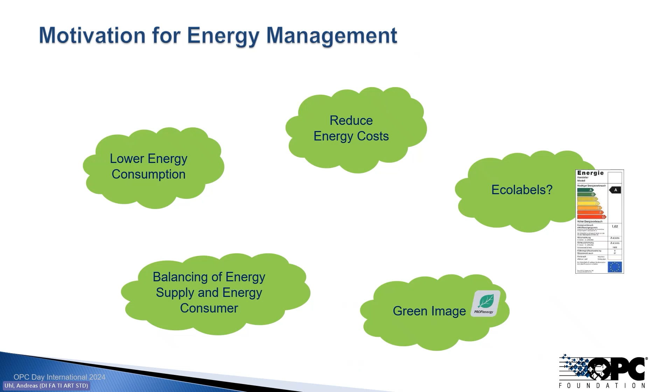But first, let's have a look at application areas for energy management. Energy saving in industrial production is a long-range topic, and the goal, of course, is primarily to cut down the costs for energy. If such a project starts, the first task is a consumption analysis, so have awareness and measure energy flows in your production. And out of this, define saving potential, so measures to save costs.

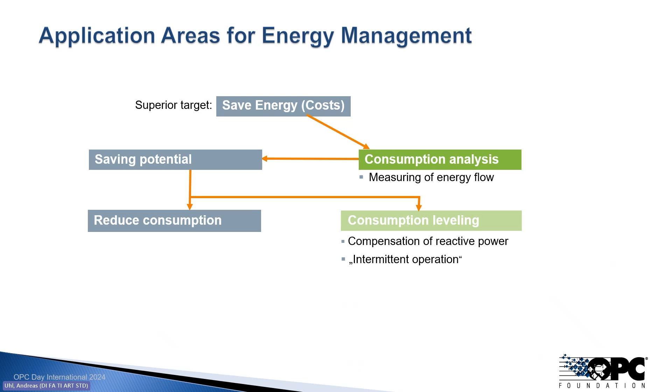And for this, you have two possibilities. Of course, reduce the overall power consumption, but also consume your power at the right time. For example, to avoid peak loads, and with this to avoid high penalty payments for peak powers, or to compensate for reactive power, and so on. But let's go further with reduced energy consumption in production.

There you have the possibility to save energy in production, in operation. This can be done by introducing a new technological process which consumes less energy, or using energy efficient components like energy efficient drives, or optimizing dynamic systems. But there's another possibility, which is also quite good: to save energy in pauses.

We have a lot of industry which is not continuous but intermittent, for example, body shops in car factories. There a lot of the equipment is only temporarily used, and if it is not used, the goal is to drive it into an energy optimized standby state. The red arrows show which measures or functionality in the energy consumption management companion specification address these tasks.

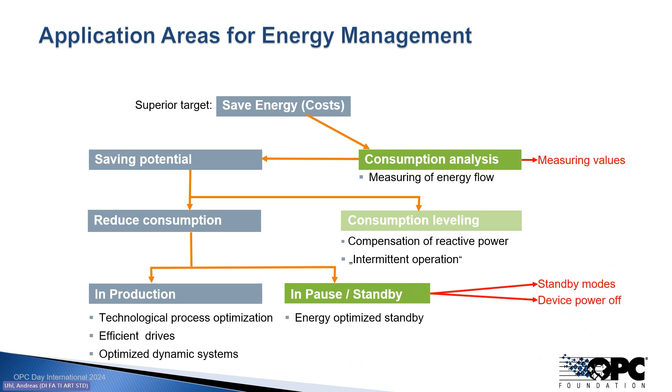And also be aware that increasing energy efficiency is a continuous process. It's not done once and then it's okay. You analyze your energy consumption, you define new energy savings, you realize them, then analyze again, and so on. And you see that to two of these three steps, the energy consumption management companion specification contributes.

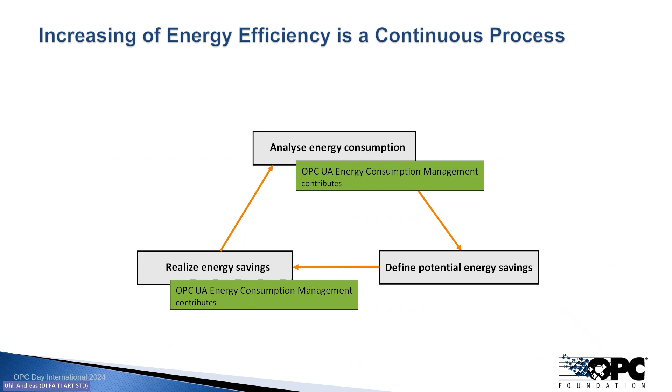But now let's have a look at what's in the companion specification, OPC UA part 34-100. There are mainly two functional clusters. The first one is power metering and monitoring. Of course we measure energy related values like power consumption or a total energy odometer. But there are also other relevant measurement values which address power quality, for example, a measurement of idle power or of harmonics, to cut down energy losses in power distribution.

Use cases for this are energy metering, of course, then evaluation of energy cuts and saving potential. But another quite important topic is predictive maintenance. Your energy consumption, your energy footprint monitored over time, gives a good indicator whether your process is running correctly, or whether machines or devices need maintenance.

The other cluster in the companion specification is power standby management. There we distinguish between two possibilities: a complete power down, switching off the device with reactivation over switch on or wake on LAN, or the device is still on power and manages its internal standby state. So that's standby pause management.

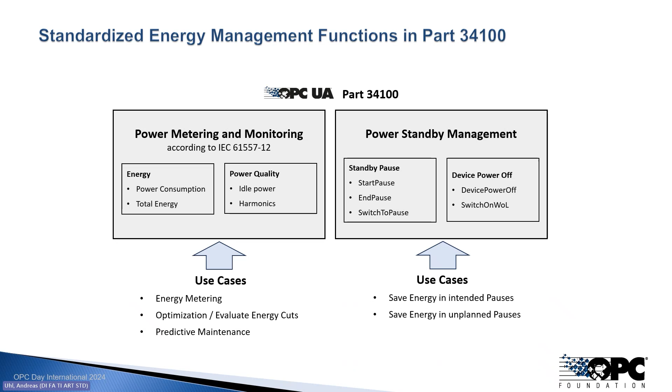But before I go deeper into the technology of standby management, I would like to give a short overview about the setup of the working group. So it's a joint working group between different partners. One is the PI organization, the Profibus Profinet organization, who introduced the PROFIenergy profile in 2012, and then some years ago created OPC UA Part 30-141, the PROFIenergy companion specification. So that's their contribution to this standard.

Then the other partner is ODVA with its CIP Energy technology, who contributed mainly energy resources which are not electric. We also get support from universities, Hochschule Hannover and Helmut Schmidt University, with a publicly funded research project where they created a unified energy management information model. This is mainly used for the measurement values. And of course the VDMA, who hosted this working group in its machinery program, and Heiko Herden was the lead of this project.

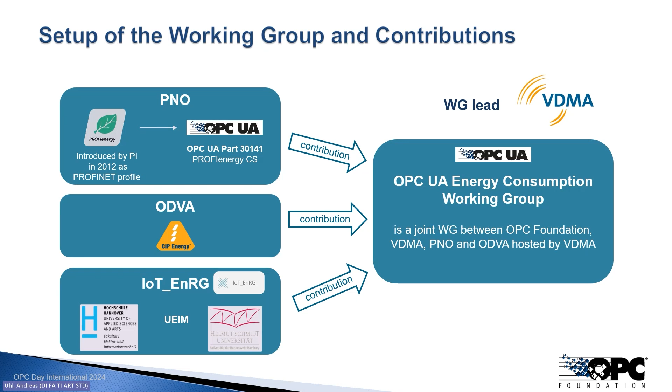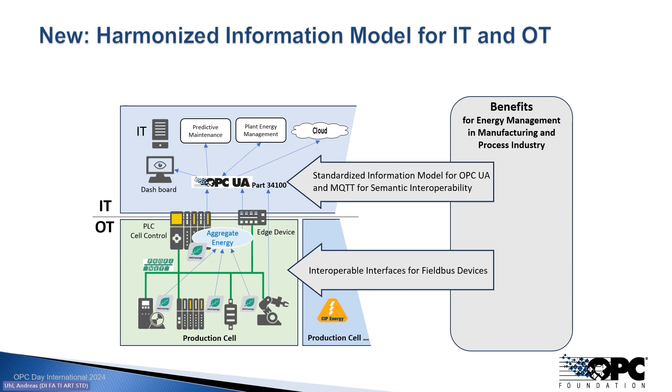So what's new now? What's the main contribution from OPC UA Part 34-100? That's to have a harmonized information model for the IT world. So now it's possible to map all the different energy-related variables from the OT area, from production cells running different fieldbus systems and different energy management profiles, in a harmonized way to the IT world in a harmonized OPC UA model.

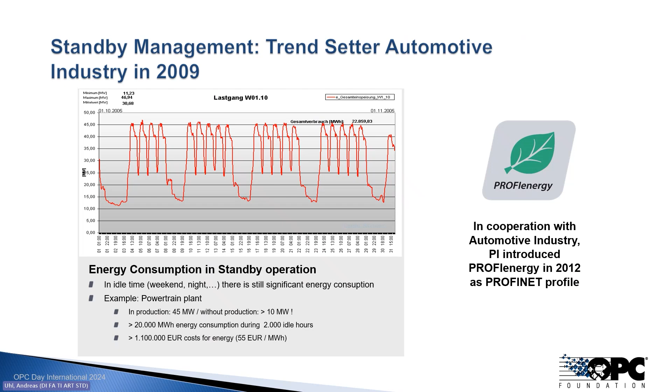So now let's have a short look at what standby management is and how it works. Standby management was the very early functionality of energy management in industrial production. It started in 2009, because of the financial crisis. The automotive industry found that even when nothing or less is produced, there's high power consumption. So it was obvious that standby management was needed to have a more efficient usage of energy. And this was when PROFIenergy was introduced in 2012.

So this figure shows the standby management basic model. Energy saving in standby management takes place in a pause situation. So the machine or device is not in operation; it's in pause, which is here addressed by the state ready to operate. And then the device offers one to multiple energy saving modes.

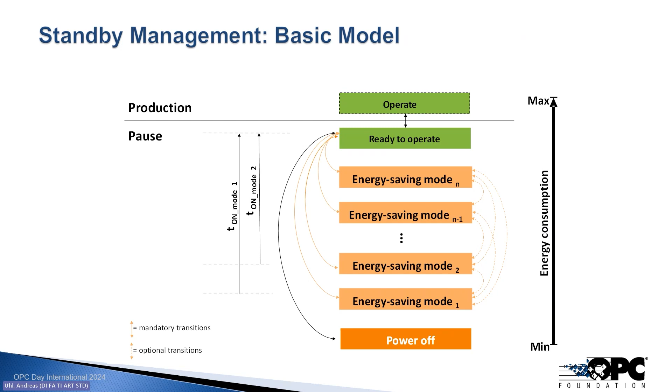They differ in power consumption, and typically if an energy saving mode has less power consumption, which means it saves more energy, it needs more time for switching into the energy saving mode or back to ready to operate. Therefore typically low energy saving modes with high switching times are used in long pause situations, while high energy saving modes with short switching times are used for short pause situations.

Another important feature of standby management is the definition and the attributes for the standby mode. In this figure, you see how a device moves from ready to operate into an energy saving mode and back, and all the attributes related to the standby mode. Only energy variables, power variables, and time variables are used. Therefore, the energy saving mode fits every device, every machine, and every application process. So much for the theory of energy management. Now let's go further to the companion spec and the information model, and for this I would like to hand over to Wolfgang.

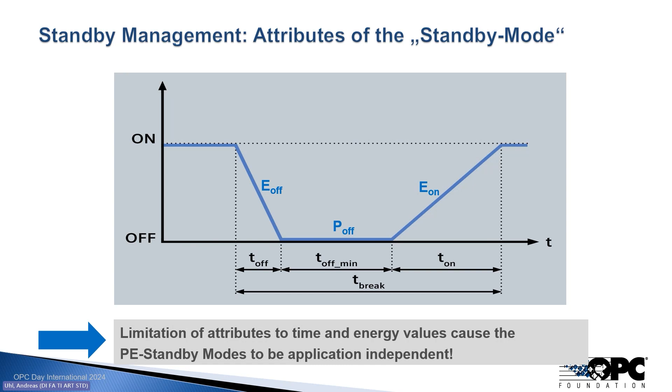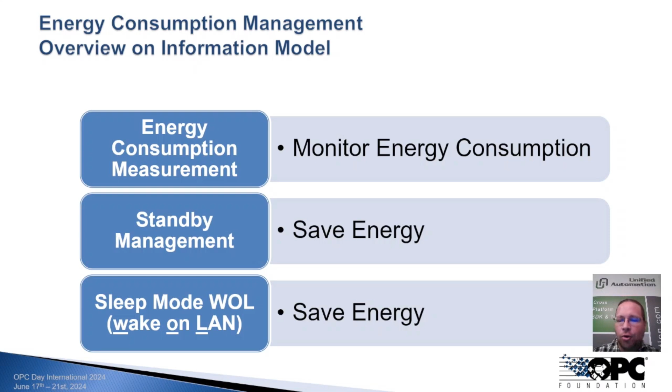All right, so welcome to the information model part of energy consumption management. It's mainly split into three areas. One is energy consumption measurement in order to monitor energy consumption. Then we have standby management to save energy, and also the sleep mode wake-on-LAN functionality to save energy. The energy consumption measurement is done in a way that we represent points in a system to measure potentially several energy data.

Therefore, we have defined an object type called EnergyMeasurementType. It contains an application tag to uniquely identify the functionality. This application tag can be set by the end user or the system integrator. And then it has one or more variables representing individual measurements. We defined a specific variable type for those, providing additional metadata like the accuracy of the measurement, the engineering unit, of course, and other things. We will look into this in the next slides.

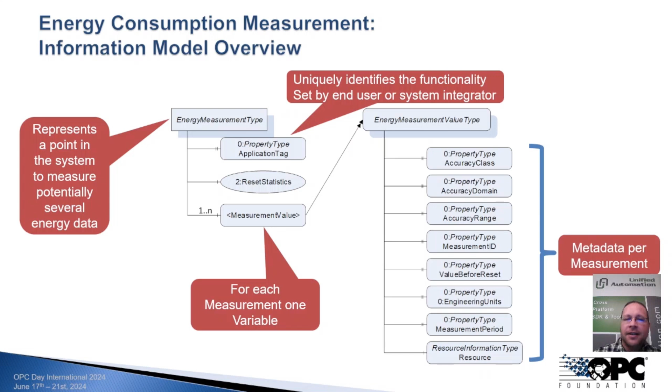In addition, if the energy measurements are aggregated over time, we have the possibility to reset them and start the measurements from the beginning. For this, we're using some base infrastructure from the industrial automation specification.

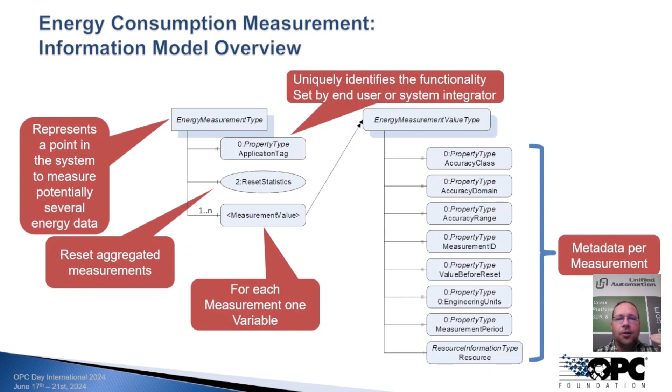So let's take a look into an example first. We have here a system where we have two measurement points. One is a power meter and the other one is for air extraction. The power meter is measuring three different aspects. One is the active power, and then we have the active energy consumed and the active energy generated.

The air extraction is measuring completely different things. It measures the pressure, the volume flow rate, the volume, the temperature. So you can see we do not only deal with electrical energy, we deal with all kinds of energy. The different things you can measure, we have standardized those. We have defined specific measurement IDs. So you can see here on that slide a small excerpt of some of them, including the pressure, temperature, volume,

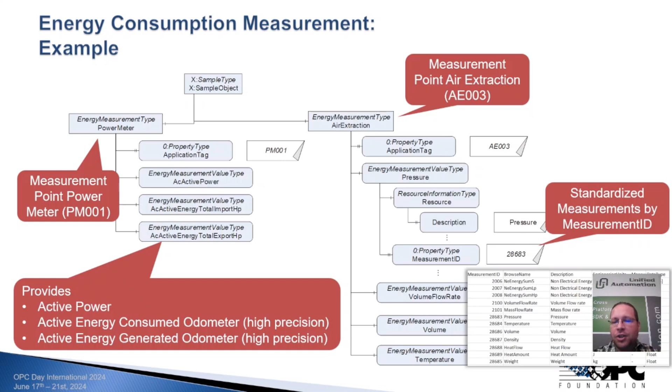and so on. In general, those measurement IDs are defined in a comma-separated value file. We have over 250 standardized measurements already defined in the first version of the specification. They all have, of course, a unique ID, and then they have a predefined name, a predefined description, and engineering unit. We also define the measurement period and, of course, which data type to be used.

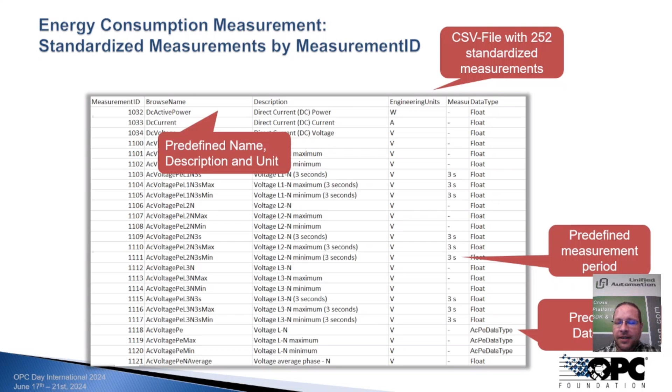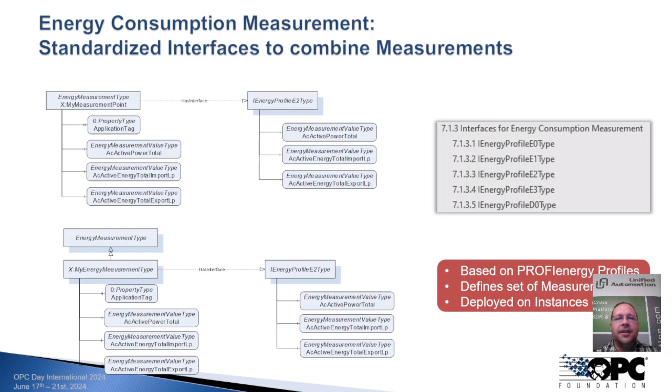Having over 250 different of them is, on the other hand, of course, also challenging. So which one should I provide? For the most common use cases, we have defined a few interfaces defining a set of measurements that you're supposed to provide. Those interfaces are based on PROFIenergy profiles. Might be that we add more of those in the future, and they are all on electrical energy, and that helps you in picking which of those are actually supposed to be supported. And they can, of course, be deployed on the instance directly or on a type, depending on how you're doing your model.

The information about the accuracy, how the measurement is done, is provided by, first of all, having accuracy domains, and then each accuracy domain has a set of accuracy classes. So there are different ways to expose the accuracy. Each measurement is referencing which domain is used, and then, of course, the concrete accuracy class in that accuracy domain.

We have defined 4 different accuracy domains. The server represents in its address space the accuracy domains it's supporting. Potentially you can also add additional ones. We hope that the ones we have defined are good enough for your applications, for your use cases. And you, of course, only have to provide those which you're actually supporting in your server. And as I mentioned, all the measurements are pointing to what accuracy domain they're referencing, and then providing the concrete accuracy class in the context of that accuracy domain. So this is about the energy consumption measurement.

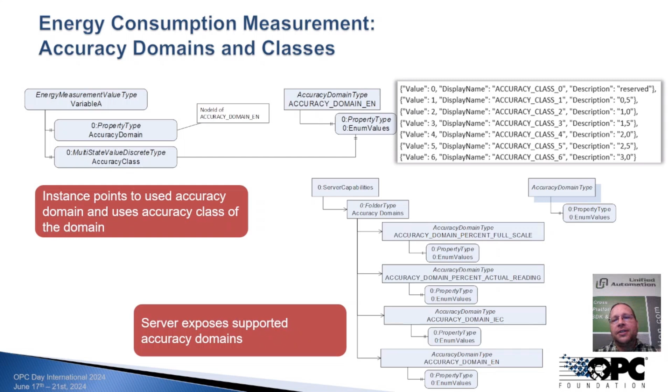And then, as you have learned, we have those different energy saving modes, and they are also provided here in what concrete energy saving mode you're in, and of course also providing the metadata, what are the supported modes in order for you to interpret the data or provide the data in a reasonable way. And in addition, we do provide control methods to switch the energy saving mode or go in or go out of the energy saving mode.

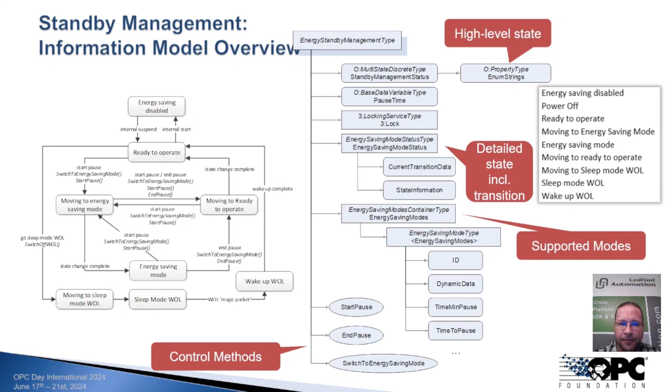And then we have the wake on LAN functionality. We have an additional object type for that, and this provides a bunch of metadata for this wake on LAN functionality, plus a control method to control that functionality.

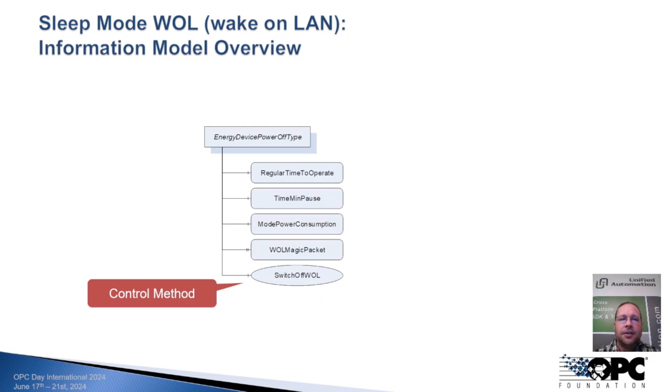To summarize all that, we have the energy consumption management companion specification out as a release candidate, and it will become a release very soon. The content is, of course, we have the energy consumption measurements, not just electrical energy. We have standardized over 250 different measurement IDs. Of course, if you have some, let's say, more uncommon measurements, you can use them in the context of the specification as well.

We have 5 profiles for common usage of energy measurements. The energy saving can be done by the standby management and the sleep mode wake on LAN functionality. This specification hopefully soon becomes a release. In addition to that specification, we're currently working in the machinery working group on integrating that into the machinery specification, so that you have a common way to represent this energy measurement information and functionality in a machine or a component of a machine in the best way, and from a client perspective, be capable to find that information.